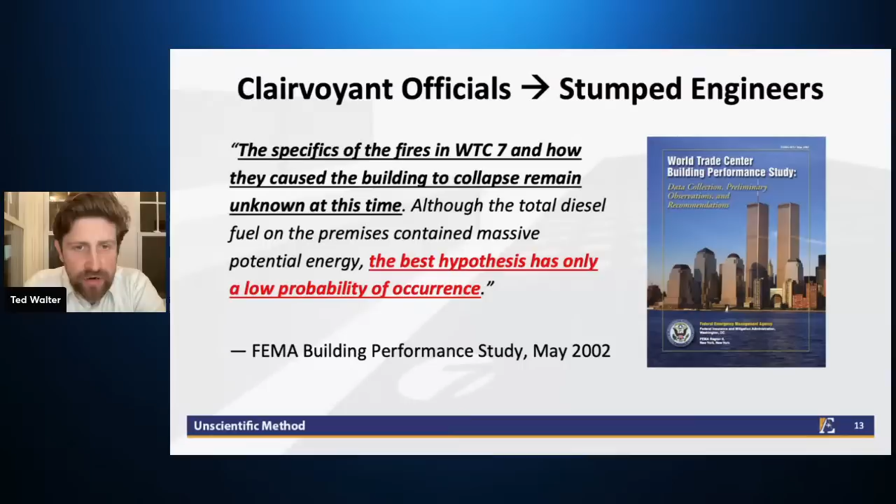Here's another example. In May of 2002, FEMA published a preliminary report on the collapse called World Trade Center Building Performance Study, Data Collection, Preliminary Observations, and Recommendations. In the concluding section of the chapter on Building 7, they said: the specifics of the fires in WTC 7 and how they caused the building to collapse remain unknown at this time. Although the total diesel fuel on the premises contained massive potential energy, the best hypothesis has only a low probability of occurrence. So how were officials able to predict something that had such a low probability of occurrence? Something that could not be explained 9 months later after the event.

Let's continue. Now we are 5 years after the event. This is the lead investigator for NIST, the National Institute of Standards and Technology, being interviewed for an article in New York Magazine, March of 2006. At that time, NIST had been studying the collapse for around 3.5 years, since they started their investigation in August of 2002. NIST did have some preliminary hypotheses on 7 World Trade Center, but Sunder paused: 'But truthfully, I don't really know. We've had trouble getting a handle on building number 7.'

Okay, fast forward to 2008, and the mystery has now been solved. First, I'm going to play a clip where Dr. Sunder announces their conclusions.

Our take-home message today is that the reason for the collapse of World Trade Center 7 is no longer a mystery. World Trade Center 7 collapsed because of fires fueled by office furnishings. It did not collapse from explosives or from fuel oil fires. It collapsed because fires, similar to those experienced in other tall buildings, burned in the absence of water supply to operate the sprinklers, and burned beyond the ability of firefighters to control it. It fell because thermal expansion, a phenomenon not considered in current building design practice, caused a fire-induced progressive collapse.

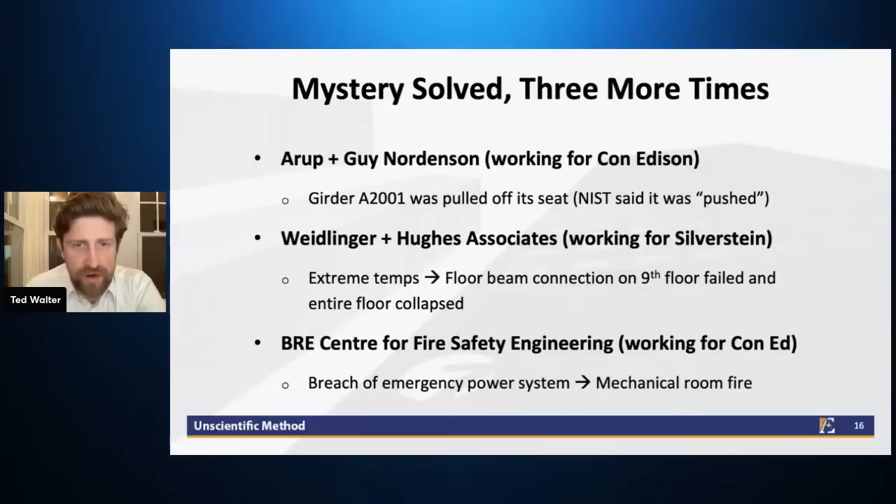So how do we have all these different theories of fire causing the collapse? Isn't there just one theory that we have all of this evidence for?

This is from a paper by Jose Torero, who I just mentioned. He and his co-authors wrote: after years of investigation by some of the world's leading experts in both fire and structural engineering, there remains multiple possible hypotheses without any consensus on how the building behaved and failed because of the fire. They continue: the collapse of WTC-7 remains to this day a unique event in the history of structural fire engineering. Despite occurring nearly 20 years ago, there's no real way to know exactly what caused its failure.

So basically, he's saying that the mystery actually can't be solved. This mystery will go on forever.

So what does all of this mean? Well, one thing it means, at least, is that there is no conclusive evidence supporting any of these hypotheses. If there was conclusive evidence, there would presumably be consensus around it. I think we should view skeptically all of these fire-based theories, because if there was conclusive evidence, I think a consensus would have developed around one of these. And it wouldn't have taken all of these engineers so long to come up with these theories.

So we're going to focus on the NIST investigation, because that is the investigation conducted by the U.S. government. NIST was statutorily mandated by Congress to establish the likely technical cause or causes of the building failure. It is thus the only investigation responsible to the public and guided solely by an interest in discovering the truth, or should have been, whereas the other investigations were private investigations that were part of a lawsuit.

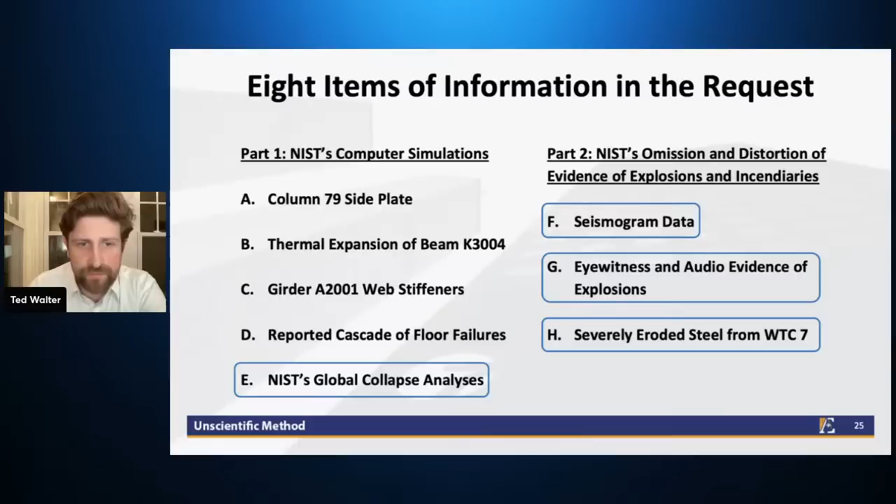Again, just reminding you what the three areas of evidence are: the building's structural behavior, the evidence of explosions, and the evidence of incendiaries. These are the different sections of the request for correction that correlate to each of those areas of evidence. So Section E, NIST global collapse analyses, looking at the structural behavior of the building, is where we're going to start.

This is a key claim that was made in the NIST report: given the complexity of the modeled behavior, the global collapse analyses match the observed behavior reasonably well. The global collapse analysis confirmed the leading collapse hypothesis.

So because there was no physical evidence—it was all destroyed in the weeks and months after 9/11—NIST's investigation basically conducted itself by coming up with a scenario that it could run in its model, and then it could say our model matches the observed behavior in the videos.

So this is a key claim here: how well does our model match the observed behavior? If it matches it, then perhaps our hypothesis is correct. If it doesn't match it, then your model is actually disproving your hypothesis. And this is what we argue.

The latter is what we argued in the request for correction. This was the claim that we made: contrary to NIST's assertion, NIST global collapse analyses do not match the observed behavior reasonably well and do not confirm NIST's leading collapse hypothesis.

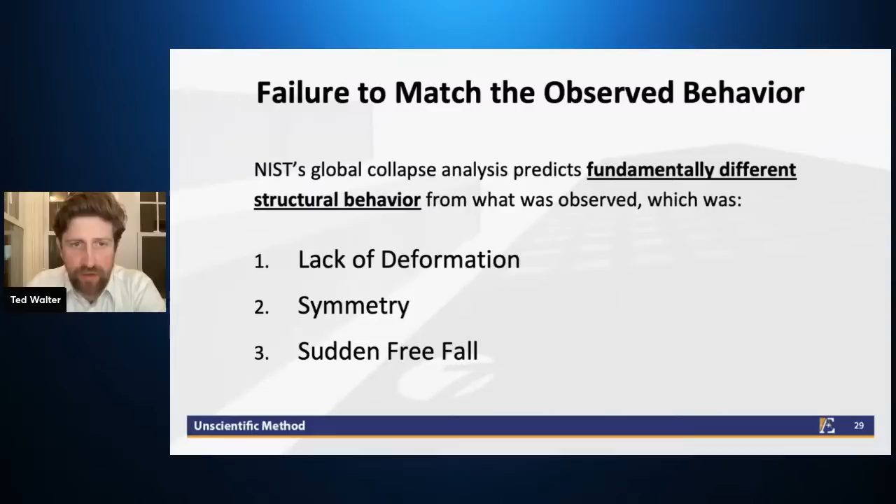So let's take a look at the video and let's take a look at NIST's model. First I'm going to play the same video we saw before during the news clip, but now there's none of the news graphics around it.

A lot of people will look at that animation and say, well, that doesn't really look like the real thing. And those people, I think, are right. In the request for correction, we went a lot deeper and methodically showed the ways in which this animation of the global collapse analysis did not match the observed behavior.

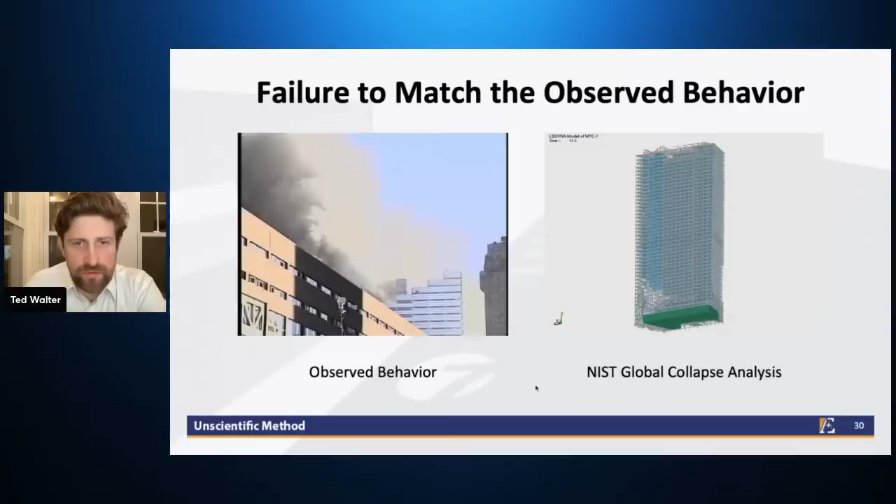So, the lack of deformation. NIST does us some favors - by us, I mean people interested in understanding what really happened. They do us some favors throughout their report here and there. One of them is in figure 5-201, where they overlay two separate shots of the building.

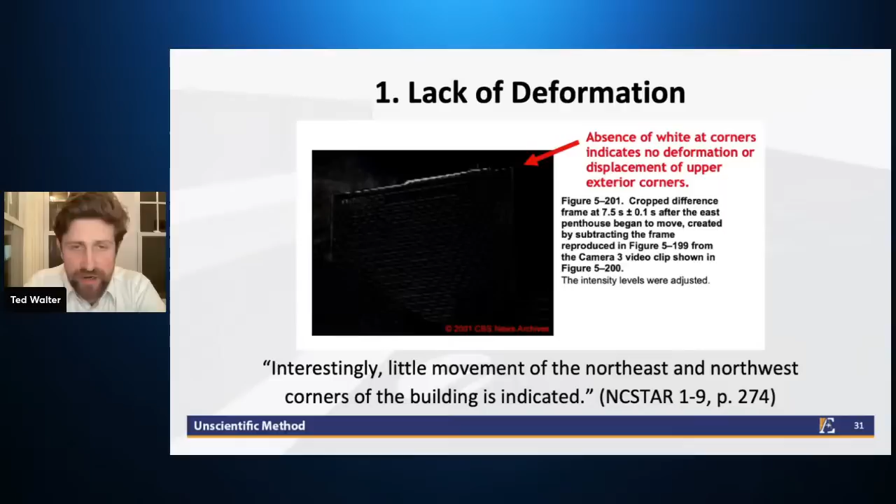We're going to get into that issue a little bit later, but the main thing to observe here is that there was no deformation. Whenever this collapse really started, there was no deformation.

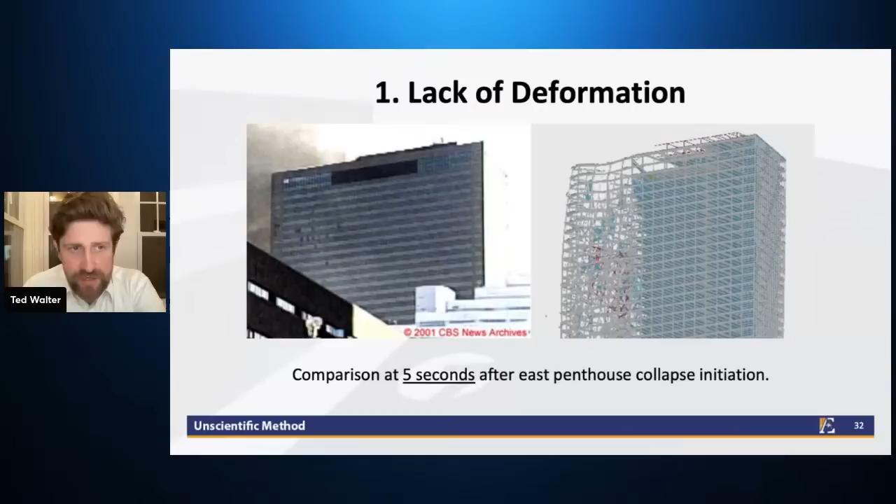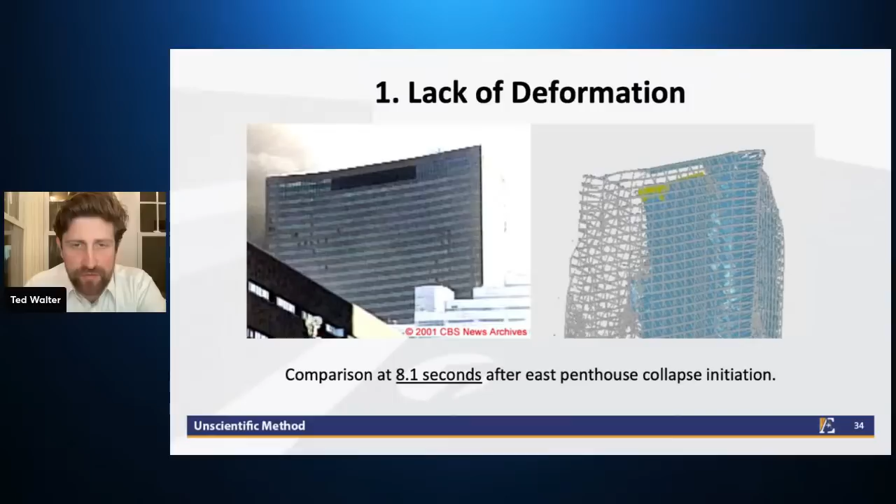Okay, and this is a figure from the NIST report just showing you that deformation from the west and from the south, just to make it very clear that we're talking about an entire side of the building basically caving in here in their model. On the right, we've actually overlaid - at a certain point, I believe that's at 7.5 seconds after the collapse initiation - we show how much deformation there is by overlaying what the building looked like before the collapse initiated.

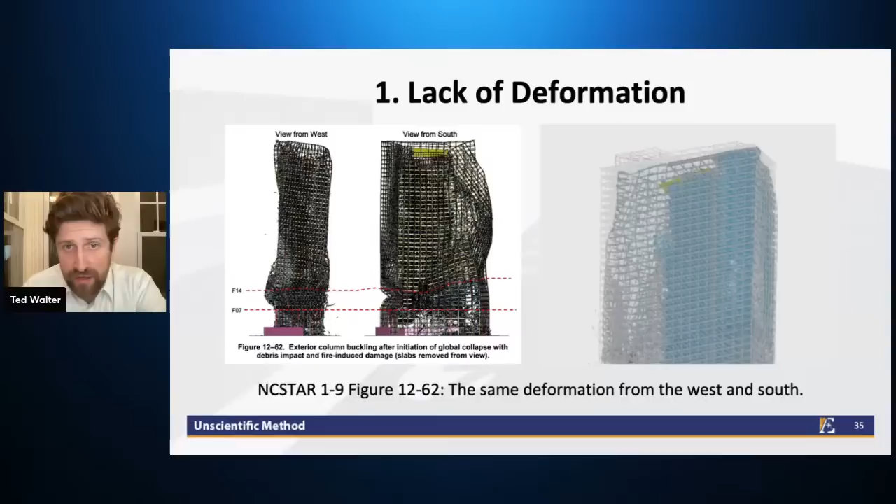Now, NIST realizes that this is a problem, and so they try to downplay the extent of deformation that was predicted in their model. They try to say only later in the model, after the initiation of global collapse, do the upper exterior wall deformations from the NIST analysis differ from the video images - trying to paint this picture that once the thing started to go down, there was a lot more movement, much harder for the model to predict the behavior, and you were going to start to see some deformation.

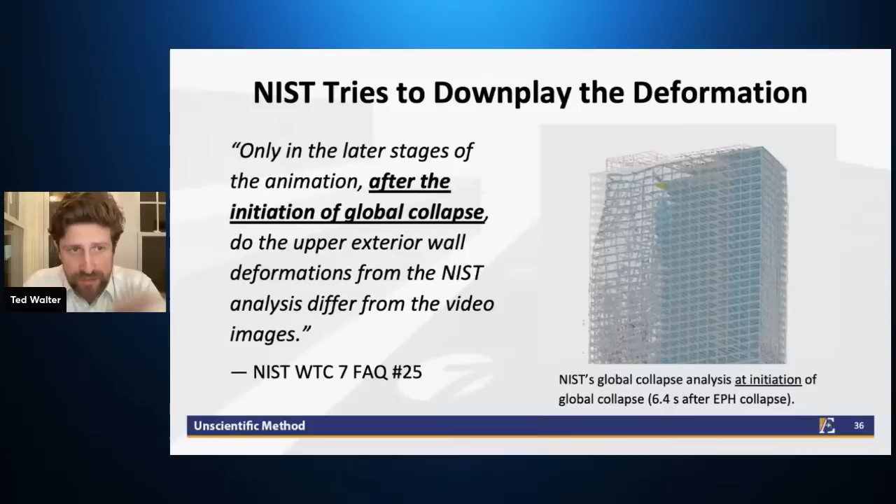Well, actually, when you look methodically at their animation, what I've done here is overlaid the animation right at the point that NIST says the collapse initiated. So in real life, the collapse, according to them, initiated 6.9 seconds after the East Penthouse collapse initiation. They say that in their model, they got the collapse to initiate at 6.4 seconds after, which they're happy with - so it's a half second earlier, but this is what they say is the start of global collapse initiation. And actually, the building has already deformed on the eastern side, has already deformed significantly. Yet they say in their FAQs that there was not any deformation until after the initiation of global collapse. This analysis shows that claim to be objectively false.

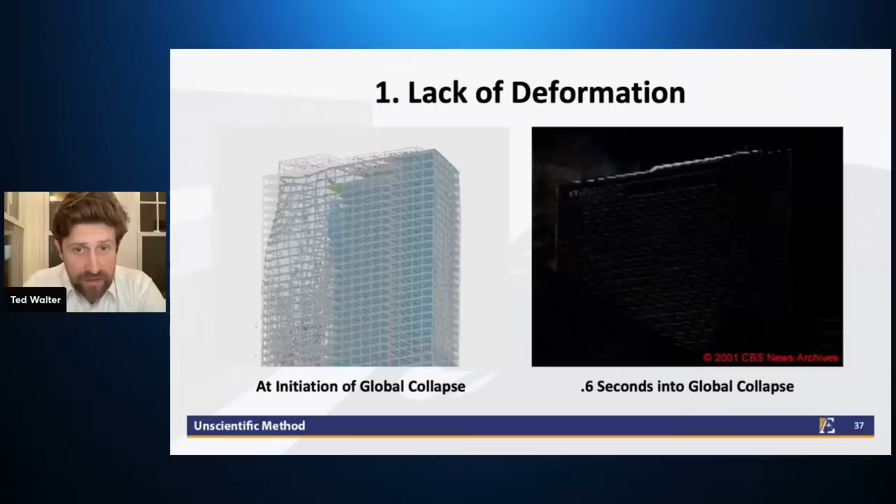So just to sum it up: NIST model proves that there would be lots of deformation if there were column failures occurring in the interior of the building. That is shown on the left - at initiation, significant amount of deformation already. On the right, 0.6 seconds into collapse, or what NIST says is the beginning of the collapse, there's no deformation whatsoever. So what does this mean?

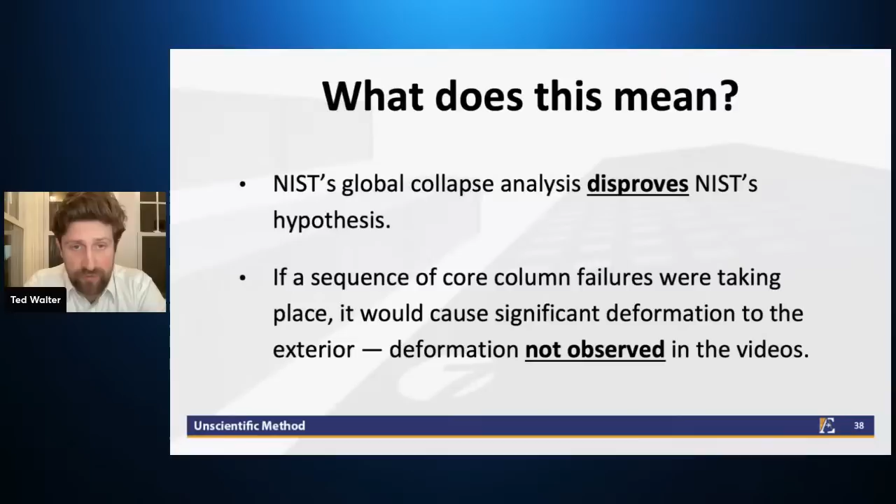NIST global collapse analysis disproves NIST's hypothesis. If a sequence of core column failures were taking place, it would cause significant deformation to the exterior - deformation not observed in the videos.

Okay, let's look now at symmetry. This section is a little bit shorter. There's not as much to show, but again, NIST does us a favor of describing what actually happened accurately.

They write: both the northeast and northwest edges began to tilt toward the north shortly after the building began to move downward. The northwest edge initially tilted in a similar manner, but then settled back to its original line and fell nearly vertically, or directly toward or away from the camera.

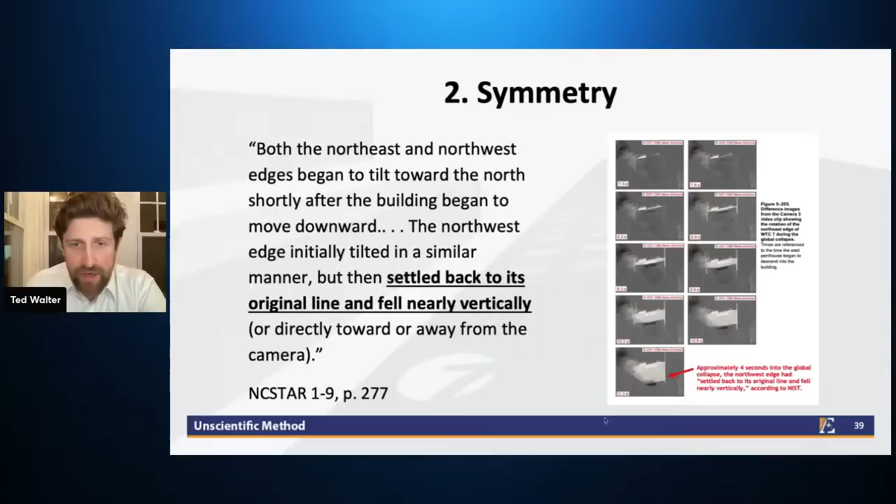So if you look at the very bottom here, this bottom shot, you can see that a full 4 seconds into the collapse, the building is still falling symmetrically in a vertical line. That's quite remarkable.

So let us ask the question: does NIST's model fall vertically, or does it tilt north first, since that's what they say happened first to part of the building? No, actually the building tips to the south.

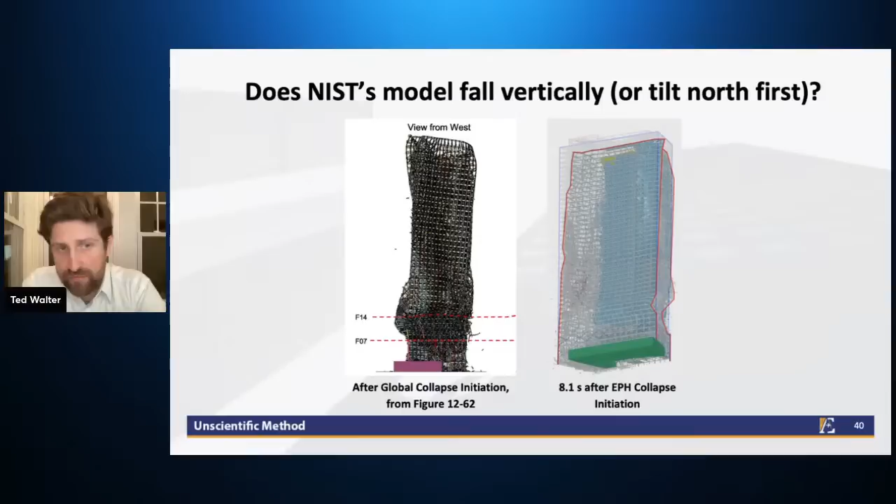On the left here, you see a figure of their model from the west, and you see the building starting to tip south. If we take the final frame of NIST's animation and compare it to when the building was standing upright, we see again that the building is tipping backwards, or to the south, tipping away from the view of the camera or of the animation.

I want to emphasize that this is very early in the collapse. This is 8.1 seconds after the penthouse collapse initiation. Over on the right here, we see this shot is 8.3 seconds, so this is very close to each other. Within 0.2 of a second, we get a lot of tipping of the building southwards.

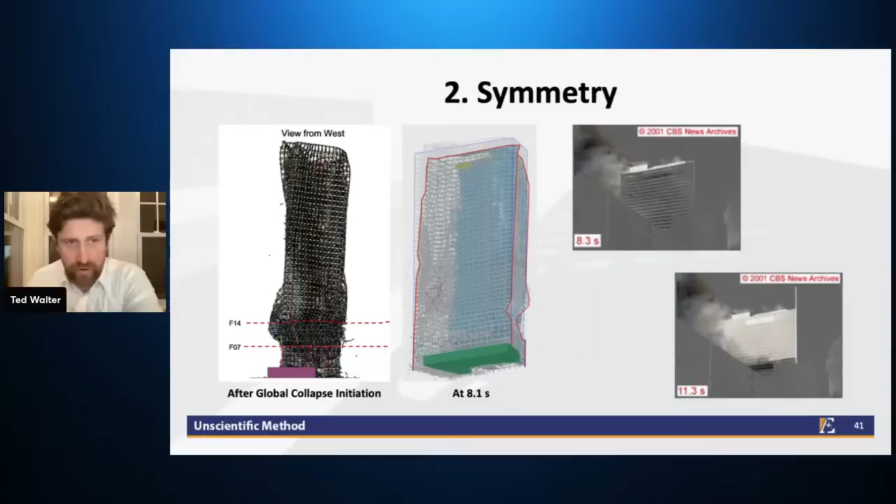We got almost no movement here in the real thing. And yet, even 3 seconds later, in the real thing, the building is still traveling downwards almost perfectly vertically. I wonder where this building would be 3 seconds later if NIST allowed the animation to keep running. Chances are it would be far more tipped to the south, maybe halfway down, halfway all the way over. Maybe that's why they terminated it.

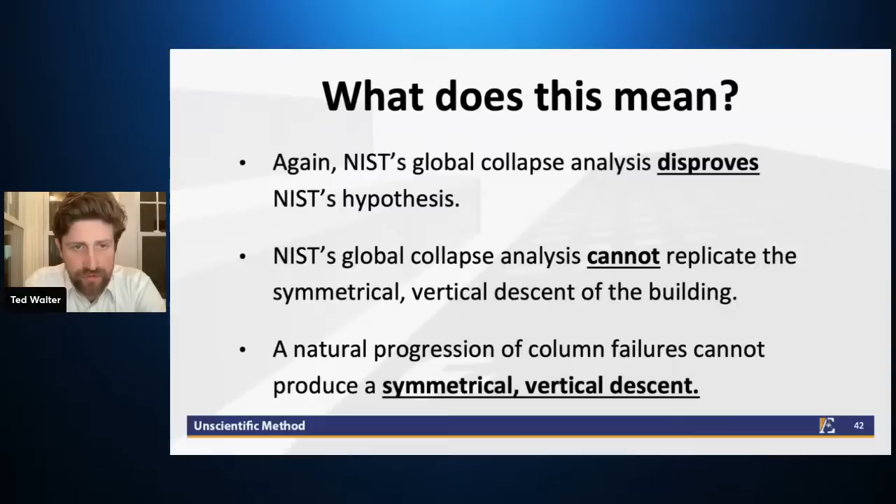What does this mean? Again, NIST's global collapse analysis disproves NIST's hypothesis rather than proving it. NIST's global collapse analysis cannot replicate the symmetrical vertical descent of the building. A natural progression of column failures cannot produce a symmetrical vertical descent, or that should be the takeaway.

Okay, the third aspect of the building's behavior was its sudden free fall. And I add the word sudden there because we have now established conclusively that the transition to free fall was instantaneous, and instantaneous across the entire width of the building, not just at one point.

So first of all, what I want to say is part of NIST being able to claim that their model matched the observed behavior reasonably well also involved mischaracterizing, at least in this case, the observed behavior. So what we wrote here: to help its claim that the global collapse analyses match the observed behavior reasonably well, NIST mischaracterizes the observed behavior.

So how did they do that? They came up with 3 stages of descent. Stage 2 is a stage that is generally agreed upon, that the building came down in free fall for at least 2.25 to 2.5 seconds.

At first, NIST actually tried to deny that the building came down in free fall when they issued their draft report in August of 2008. Thanks to a public comment by physicist David Chandler challenging NIST's claim and showing that the building actually came down in free fall, NIST eventually reversed themselves and acknowledged in their final report that it came down in free fall.

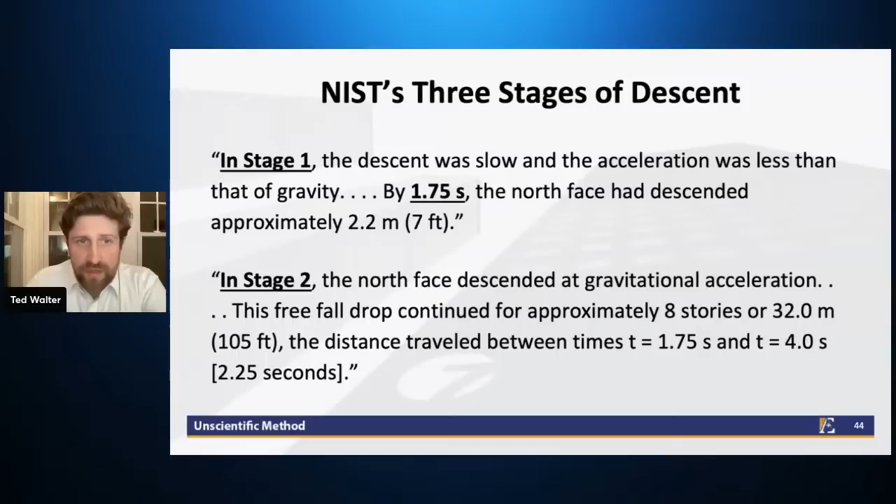The problem is, and what we really discovered as we worked on this request for correction, is that NIST based this claim—we didn't discover it, but it became, I would say, solidified through further research—NIST measured the downward motion by tracking the vertical position of a point near the center of the roof line.

Okay, so maybe many people have probably seen this graph before. It is in the NIST report. It shows that period of free fall. But again, we're looking at that stage 1. What about this stage 1 here? NIST came up with stage 1 based on measuring the movement of a single point near the center of the roof line.

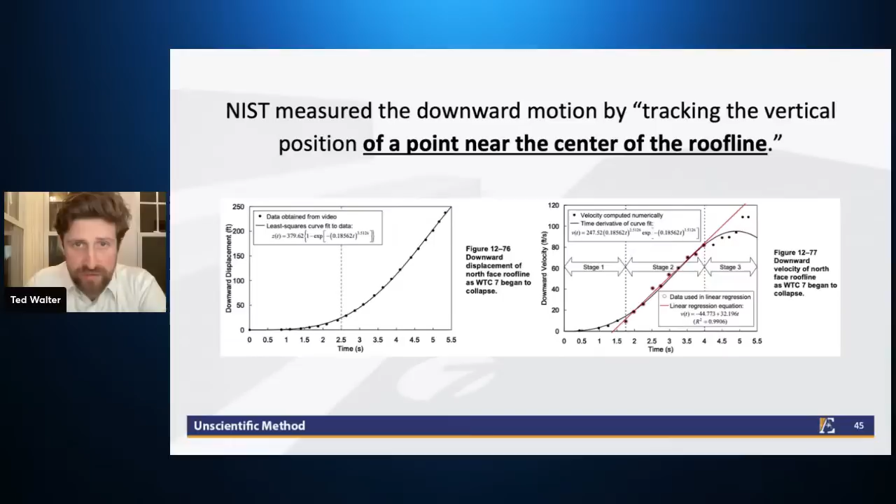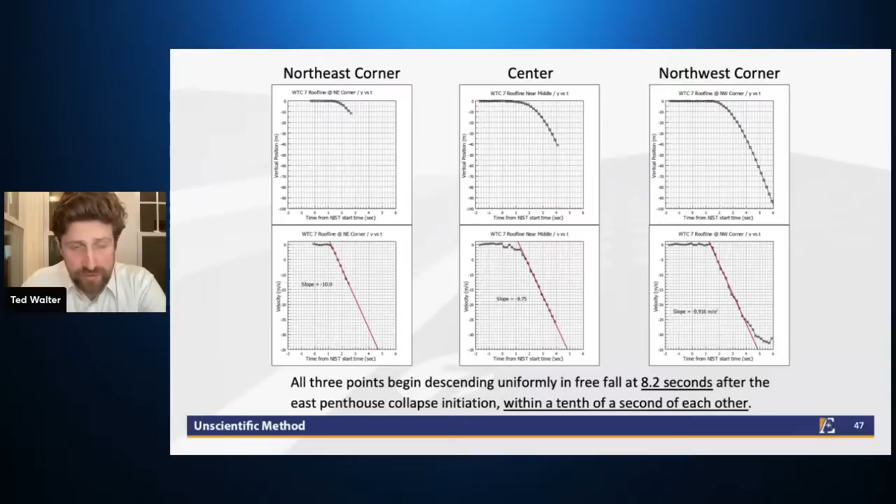This is corroborated by NIST in that first favor they did for us: no movement of the corners 7.5 seconds after the east penthouse collapse initiation. That's 0.6 seconds after the 6.9 second mark, which we'd say is artificially early. It's proven to be early because 0.6 seconds later, most of the building, the northeast and northwest corners, haven't moved at all. So Chandler's analysis is actually consistent with what NIST showed us in its report.

From that, we derive three problems with NIST's stage one. The first, least significant, is that the initial movement at the middle of the roof line lasted 1.3 seconds, not 1.75, according to Chandler's analysis. More importantly, NIST wrongly portrays movement at the middle as a smooth transition to free fall, when in fact it dropped 0.5 meter, stopped, dropped another meter, and then entered free fall. So it wasn't a gradual buildup, it was actually more of a jerky motion, and then the whole building went down together.

Most importantly, the problem is that NIST generalizes the motion of the middle of the roof line to represent the motion of the entire roof line. They say by 1.75 seconds, the north face—not the middle of the north face, just the north face—has descended approximately 2.2 meters. So in addition to making it easier for them to claim their model matched the observed behavior, maybe this is really about painting the picture of a gradual buildup to free fall, because free fall itself is supposed to be impossible.

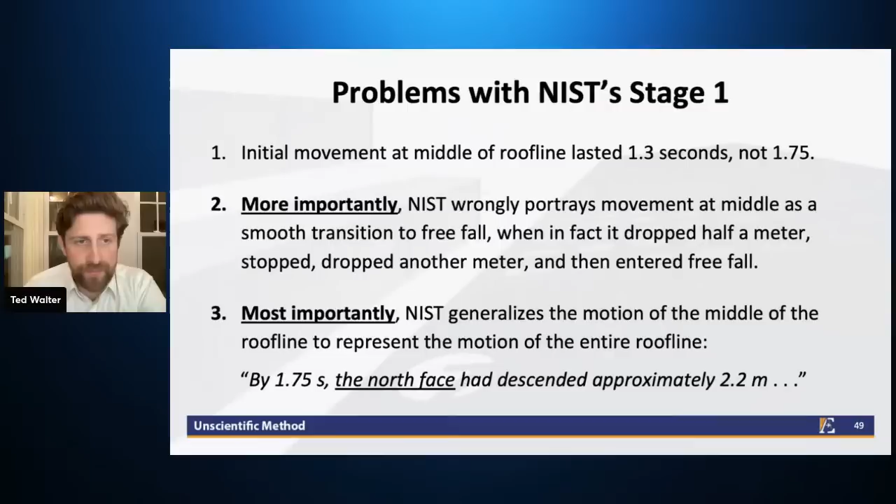So when we look at their model, do we see a sudden transition to roughly 2.5 seconds of free fall? This model on the left is very short because it's from the moment of global collapse initiation to the end of the model, which is about 1.5 seconds or less.

Oh yeah, 1.8 seconds. I'll play it for you once more. Okay, when we actually measured the distance it traveled in that 1.8 seconds, we see a 1.5 story descent. That's what we're pointing out here on the right. If you look closely, you can see it descended about 1.5 stories, approximately 6 meters over that 1.8 seconds.

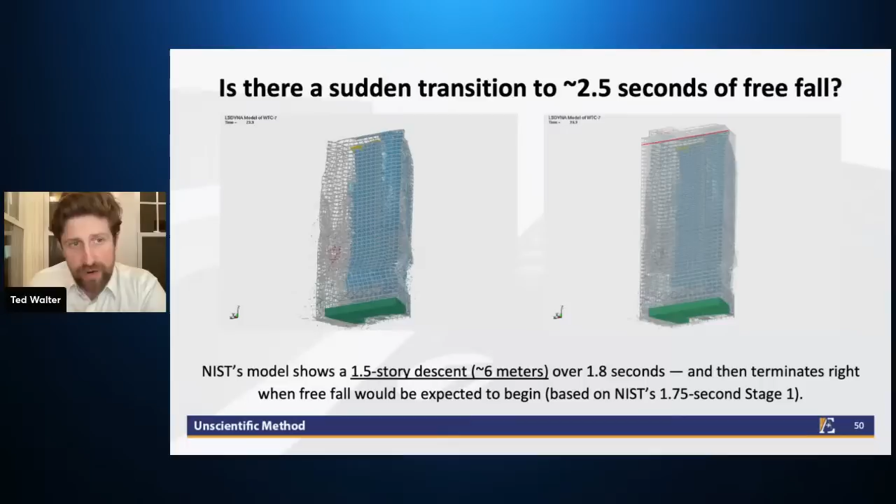And then it terminates right when free fall would be expected to begin. If we take NIST's 1.75 second stage one to be true, that would mean around 1.75 or 1.8 seconds we would then see free fall. And that's right when the model terminates.

The observation here, I'll just spell out what I was getting at: a 1.5 story, 6 meter descent followed by premature termination does not match the observed behavior that we know to be true, or even NIST's 3 stages, because NIST stage 1 had a 2.2 meter drop.

Yet NIST claims in its report that the 3 stages of collapse progression are consistent with the results of the global collapse analysis. Well, that's just objectively false, because there's no way, when you look at their animation of their model, that it is consistent with either the 3 stages of collapse, or even at least stage 2 and stage 3. But not even NIST's made-up stage 1.

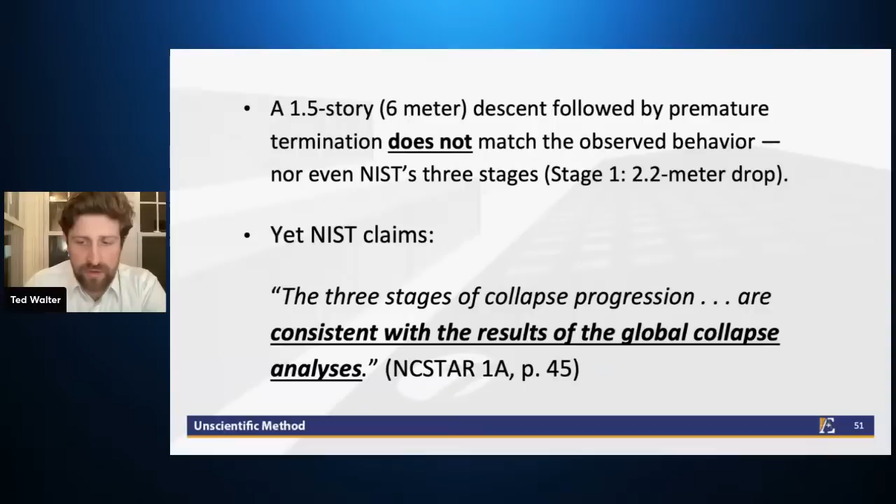So what does this mean? Just as before, NIST's global collapse analysis disproves its own hypothesis. NIST's global collapse analysis cannot replicate the sudden transition to approximately 2.5 seconds of free fall.

The reason I say cannot and does not is because I suspect, based on what we know from our other analysis or other criticism of NIST's modeling and its probable collapse sequence, that NIST did everything it could to get its model to behave the same as the building actually behaved. And so this is the closest that it could possibly get. That's why we say cannot.

A natural progression of column failures cannot produce, the takeaway here is that a natural progression of column failures cannot produce a sudden transition to sustained freefall.

So the question then is, how does NIST even come close to claiming that their model matches the observed behavior? They have all of these observables that they say their model either predicted or that are at least consistent with things that happen in real life, temporally consistent with their collapse scenario. So there was an east-west vibration of the building of 2 inches that occurred 6 seconds before the east penthouse collapse initiation.

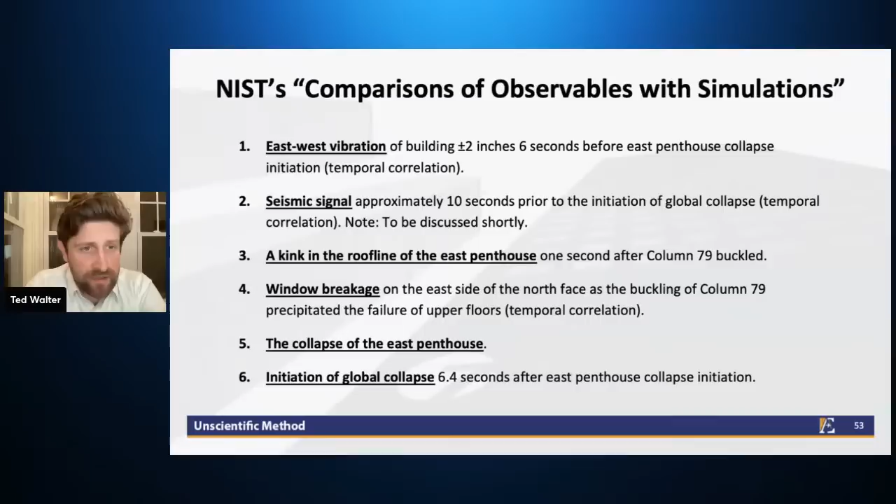The collapse of the east penthouse, and then the initiation of global collapse. So they're very pleased that they managed to get their model to predict the collapse of the east penthouse and the initiation of global collapse. But the problem is all of these observables are also consistent with the hypothesis of controlled demolition, if not more consistent or better explained by that hypothesis.

So aside from achieving the collapse of the east penthouse and then the building, NIST's model predicts fundamentally different behavior from what was observed. So they managed to get those 2 events to happen, the collapse of the east penthouse and the collapse of the building. Who knows how they got it? They won't release their model.

Besides that, their model actually disproves their hypothesis because it predicts fundamentally different behavior from what was observed.

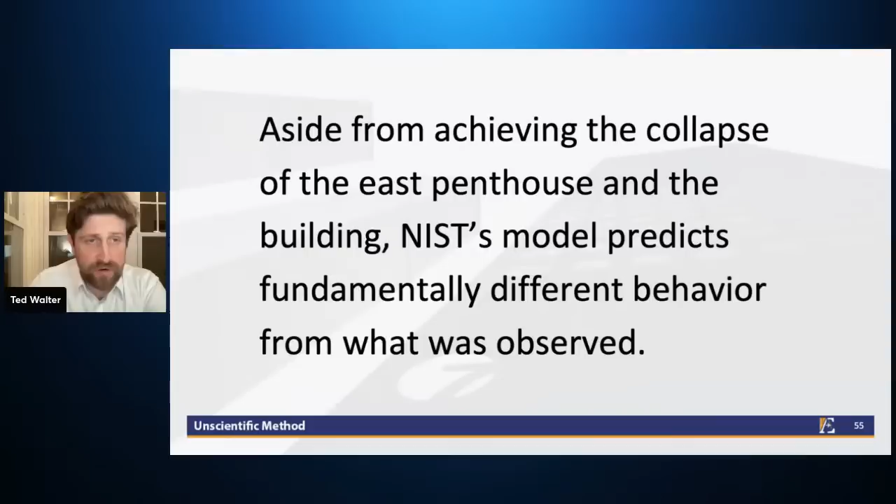In response to our request for correction, where we made all of these points in about 26 pages, NIST responded in a single page. They ignored our request to correctly characterize the sudden transition to freefall, didn't even address it. They ignored our central argument that their model predicted fundamentally different structural behavior, and basically just repeated claims they had already published elsewhere, whether in their report or their FAQs.

Including the objectively false claim I just showed before, that the upper exterior wall deformations in their animation differed from the video images only in the later stages after the initiation of collapse. I'll show you that on a subsequent slide.

After we showed objectively that there was deformation in their animation at the point global collapse initiated, they still just wrote to us in a single paragraph, repeating the previous claim as if we had said nothing.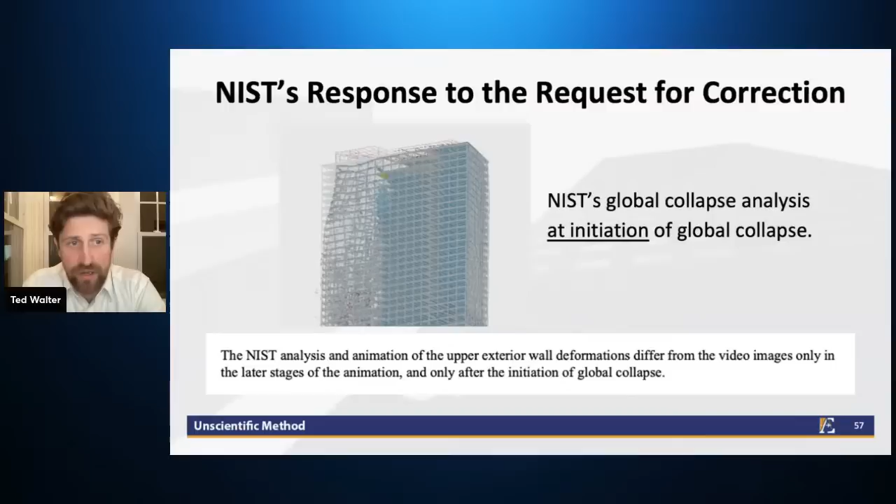That is a screenshot from their response to our request for correction: 'The NIST analysis and animation of the upper exterior wall deformations differ from the video images only in the later stages of the animation and only after the initiation of global collapse.' It was as if that point, that analysis, just didn't exist in our request for correction.

Moving on, looking at the two other areas of evidence: evidence of explosions and evidence of incendiaries. We're going to focus now on evidence of explosions. This presentation is probably going to run 75 to 90 minutes, not our typical 50 minutes or so. Evidence of explosions, seismogram data.

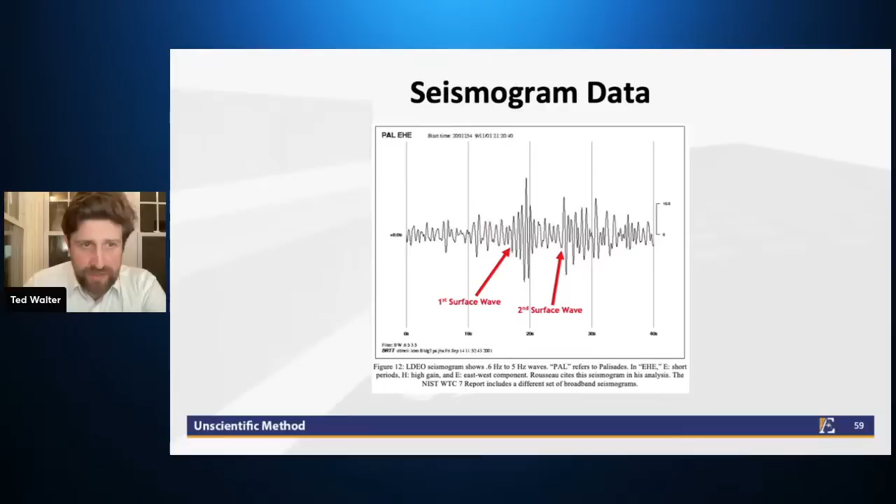This is a seismogram recorded at Lamont Doherty Earth Observatory, something like 13 miles away from Manhattan. It's part of Columbia University. People have heard a lot of conversation over the years about seismic activity when the Twin Towers went down. There was also seismic activity when Building 7 went down. In this case, there was one signal and then a second fainter signal recorded when Building 7 went down, and this is one of the seismograms that shows those waves.

So what they actually mean here is the cascade of floor failures that occurred allegedly low in the building, leading key column 79 to buckle, allowing the East Penthouse at the top to fail and collapse into the building. NIST claims that event generated seismic activity — those floors in one corner of the building collapsing over maybe 7 or 8 stories inside the building caused seismic activity that reached 13 miles.

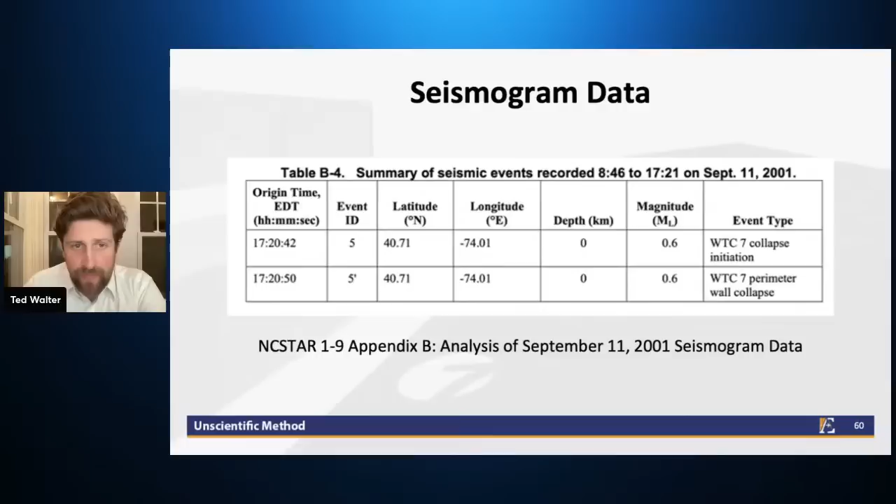This is from the appendix: there were two phases in the probable WTC7 collapse sequence that could have resulted in seismic signals. The first comprised the initial local failure and the vertical progression of failure — this is inside the building that allegedly led to the collapse of the penthouse. The interior debris falling onto the lower floors of WTC7 on the east side transmitted impact loads to the foundation.

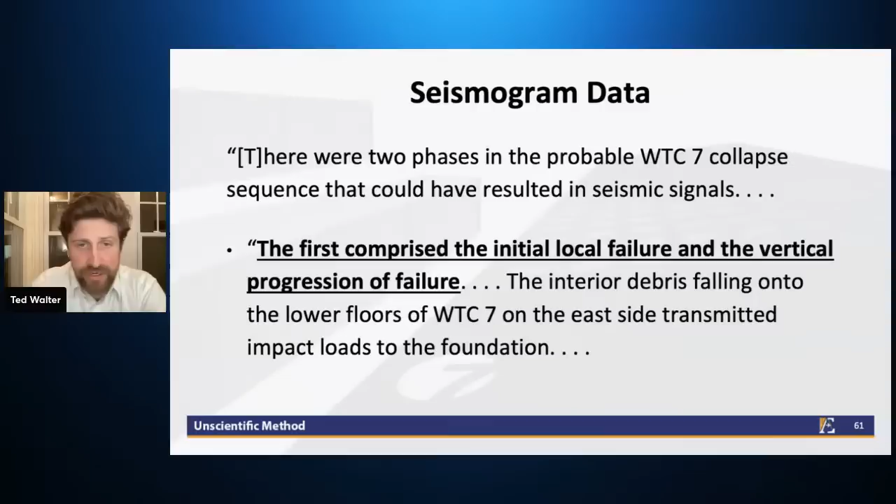The second seismic phase comprised the global collapse of the building. NIST points out that one would have expected seismic signals from this second phase of collapse to be generated over this entire episode, which lasted approximately 14 seconds, since debris was continuously impacting the ground. However, because the total energy dissipated by the impact was distributed over a long period of time, the strength of the signal at any given time was small and difficult to interpret.

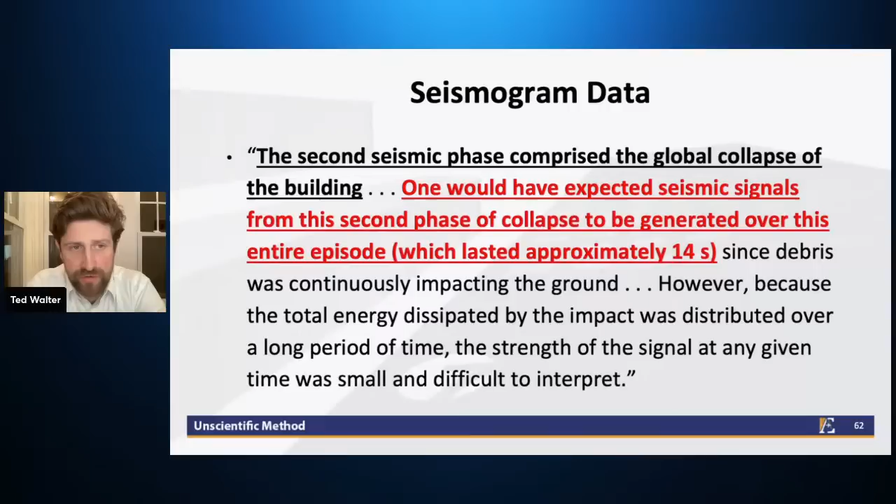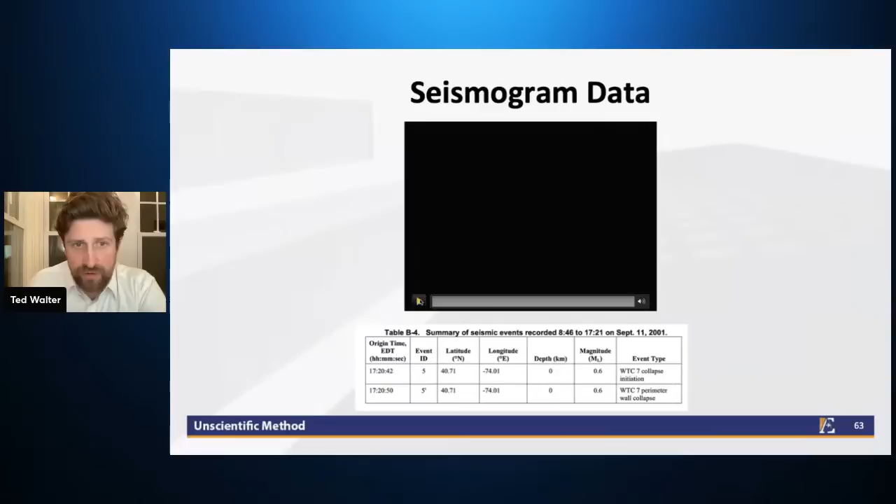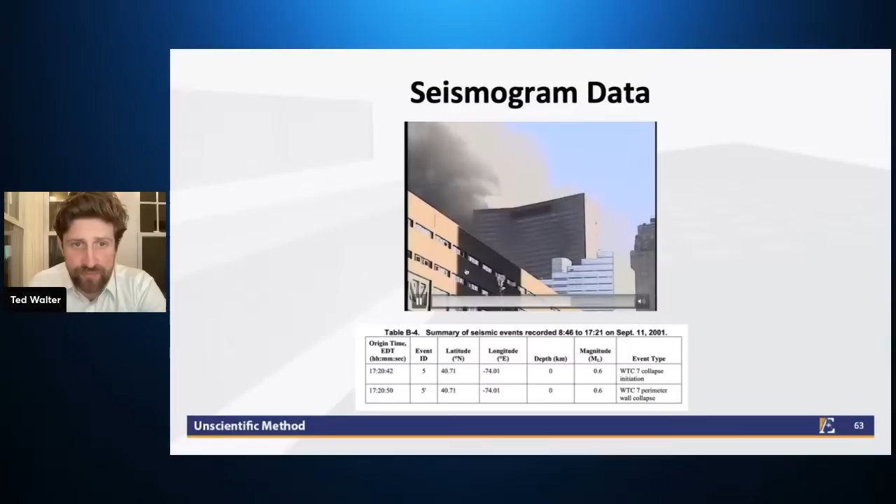I'm just going to make it very clear in case this is difficult to follow. I'll point out when these seismic signals were alleged, what NIST claims generated these seismic waves. First, right about now, or around now, there. And then right about now. And then not as much.

The first thing I want to point out, we did not include this in the request for correction because I wasn't aware of it at the time. Vaguely aware, but it didn't become totally clear to me until more recently that this interpretation completely contradicts NIST's interpretation of the seismic data for Towers 1 and 2.

This is from a paper that Graeme MacQueen, who we talked about earlier, published in 2009, looking at whether the ground shook when the South Tower collapsed. He did a lot of digging and dissecting, and he pointed out that according to FEMA, the start of the South Tower's collapse and the start of the seismic signal were simultaneous.

So what I mean by that is once the top of the South Tower started to come down, that's when FEMA attributed a seismic signal to the top of the South Tower starting to collapse. So there would be seismic activity as the collapse starts to happen, 60, 70 stories up.

However, NIST changed that. That's a whole other wormhole to go down, all the details and intricacies there and the reasons why this happened. But basically, NIST changed that and said, no, there wasn't any seismic activity during the collapses. It was only once the debris started hitting the ground.

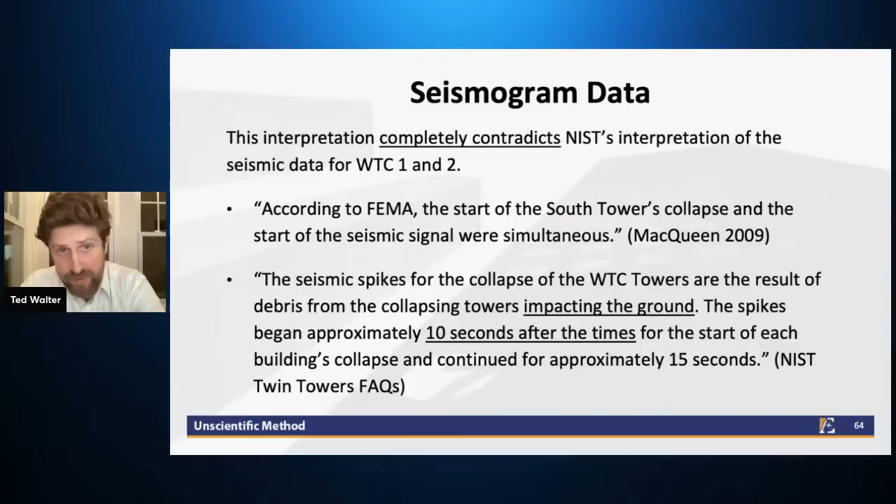But for Building 7, we have a handful of floors in one corner of the building collapsing onto each other, and that generates seismic activity. And then the initiation of the collapse of the building generates seismic activity, but not all of the debris from the global collapse hitting each other, falling to the ground for the subsequent 14 seconds or whatever. So it's completely backwards.

So these were the central claims that we made in the request for correction. NIST was incorrect in attributing the two seismic signals generated during the destruction of WTC-7 to a cascade of floor failures inside the building and to the initiation of the building's global collapse.

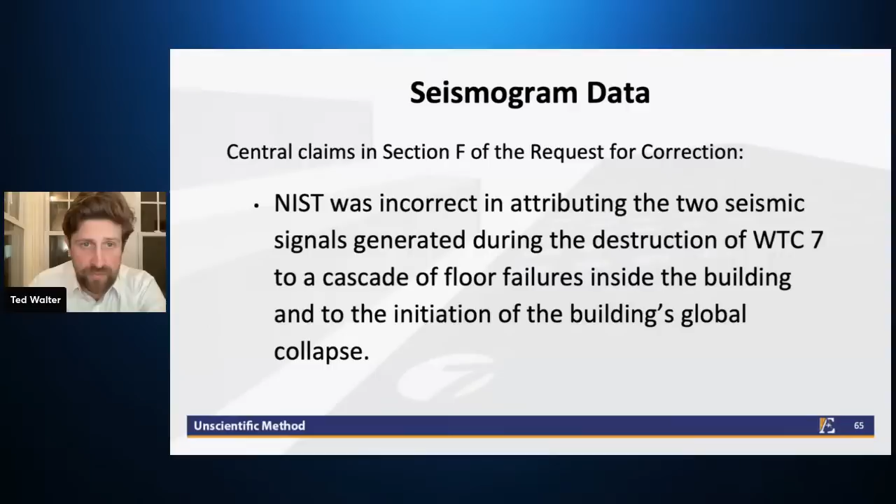The two seismic signals must have been generated by two subaerial explosions, and those are explosions that don't occur high up in the air, but also don't occur underground. They're near the ground. This is according to a geophysicist in France who provided a declaration for us. His name is escaping me at this exact moment, but you can find his paper on our website under technical papers. Andre Rousseau, that's it.

So the two seismic signals must have been generated by two subaerial explosions that corresponded in time and location to the initiation of the collapse of WTC-7's East Penthouse and to the initiation of global collapse, respectively. So we're saying that these seismic signals were generated by explosions that had to do with when the East Penthouse began to collapse and when the whole building started to come down. That's why you would see spikes of seismic activity at those precise moments.

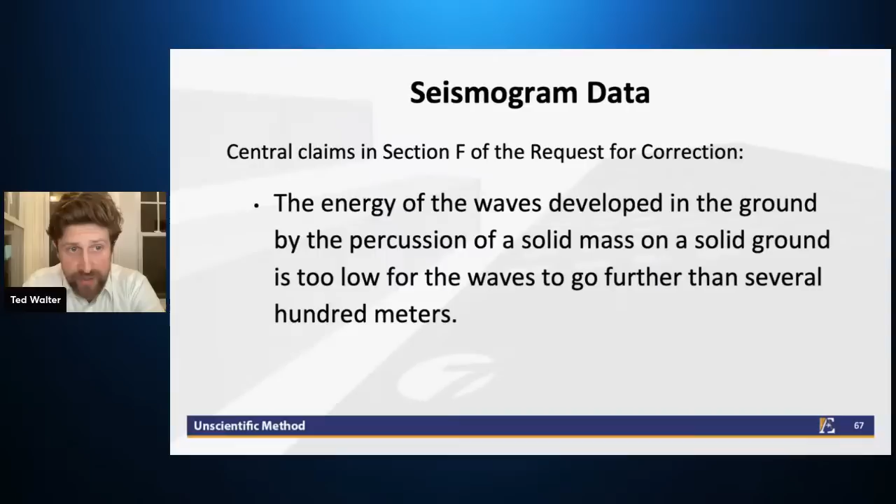The energy of the waves developed in the ground by percussion of a solid mass on a solid ground, according to Andre Rousseau, is too low for the waves to go further than several hundred meters. So he said there's no question that debris from buildings like Building 7 hitting the ground, or structural failures occurring inside the building, simply will not create seismic activity that will travel more than a few hundred meters.

And this is what I was alluding to before. NIST's probable collapse sequence is inconsistent with the observed seismic activity. The cascade of floor failures generated the largest seismic signal out of all of the seismic activity during the collapse of Building 7. The handful of floors that collapsed on each other, allegedly in the northeast corner of the building, is when we get the most seismic activity.

The initiation of global collapse generated a seismic signal. The initiation of global collapse would be associated with columns buckling, right? Not a huge amount of debris hitting each other. So why right at that moment?

And then, of course, we have 1.8 seconds, 2.25 seconds of free fall. So that third point there, the global collapse, including the impact after the top section free fell for 8 stories, did not generate a unique seismic signal. I would think if the entire top, however many 30 stories of the building, started falling for 2.25 seconds and then hit something, that maybe you would get some more seismic activity. But no, the seismic activity pretty much all occurred before that.

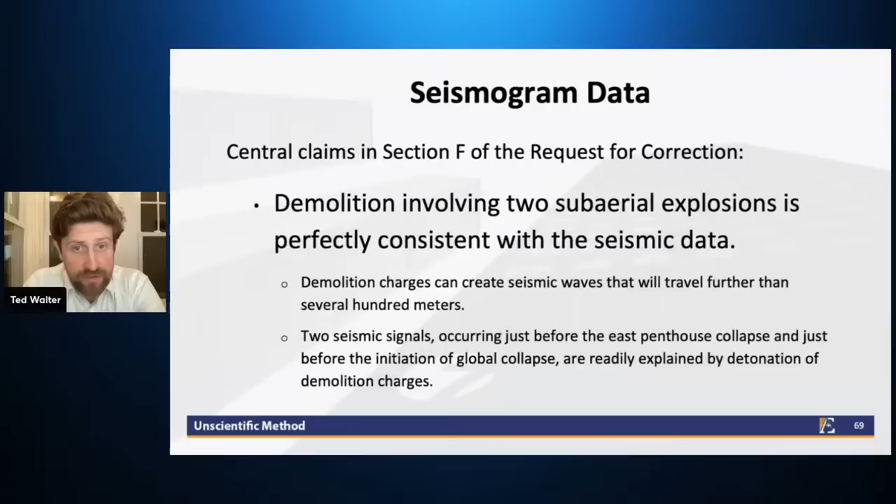Demolition involving 2 subaerial explosions is perfectly consistent with the seismic data. Demolition charges can create seismic waves that will travel further than several hundred meters. 2 seismic signals occurring just before the east penthouse collapse and just before the initiation of global collapse are readily explained by detonation of demolition charges.

NIST's response to this section of the request for correction was basically just, we disagree. It's our word against yours. And, you know, sort of the same as before, regurgitating the same points that are made in its report.

Okay, looking at the other evidence of explosions, we have eyewitness and audio evidence.

Okay, central claims in section G of the request for correction. The first claim, we made 2 separate claims. That's why I'm separating them right now. NIST ignored and distorted eyewitness reports and audio recordings indicative of explosions at the onset of and during the collapse of WTC-7. Also covered in this section, NIST distorted eyewitness reports of an explosion occurring inside WTC-7 on the morning of 9/11. This is the account of Barry Jennings and Michael Hess, which many people who are not new to this will be familiar with.

Okay, so in one section of its report, and there's also an appendix related to this, NIST writes this. They basically did an analysis that concluded that if there was any explosion capable of severing a key column in the building — they focused on column 79 — it would create a very loud sound of 130 to 140 decibels. They said there were no witness reports of such a loud noise, nor was such a noise heard on the audio tracks of video recordings of WTC-7's collapse.

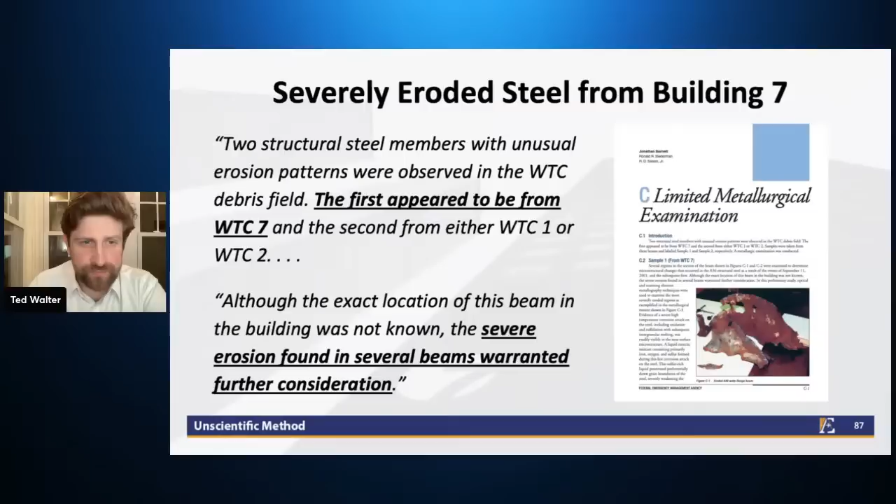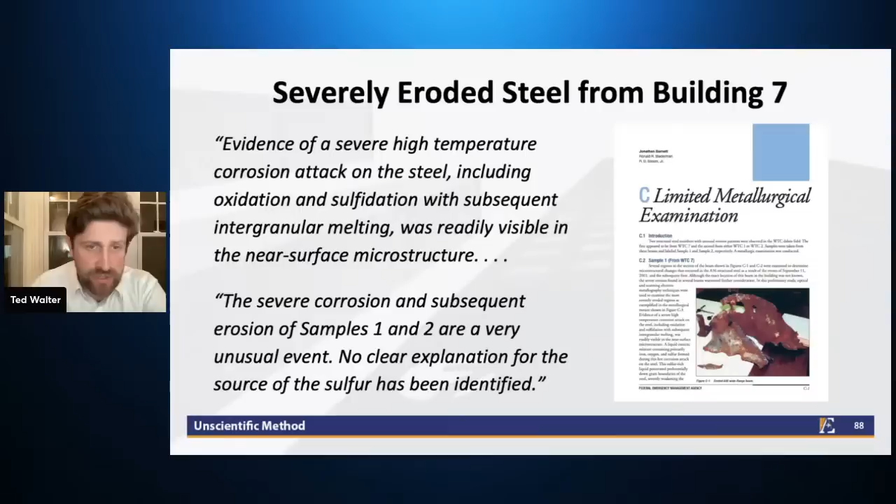Evidence of a severe high-temperature corrosion attack on the steel, including oxidation and sulfidation with subsequent intergranular melting, was readily visible in the near-surface microstructure. Severe corrosion and subsequent erosion of samples 1 and 2 are a very unusual event. No clear explanation for the source of the sulfur has been identified. A detailed study into the mechanisms of this phenomenon is needed to determine what risk, if any, is presented to existing steel structures exposed to severe and long-burning fires.

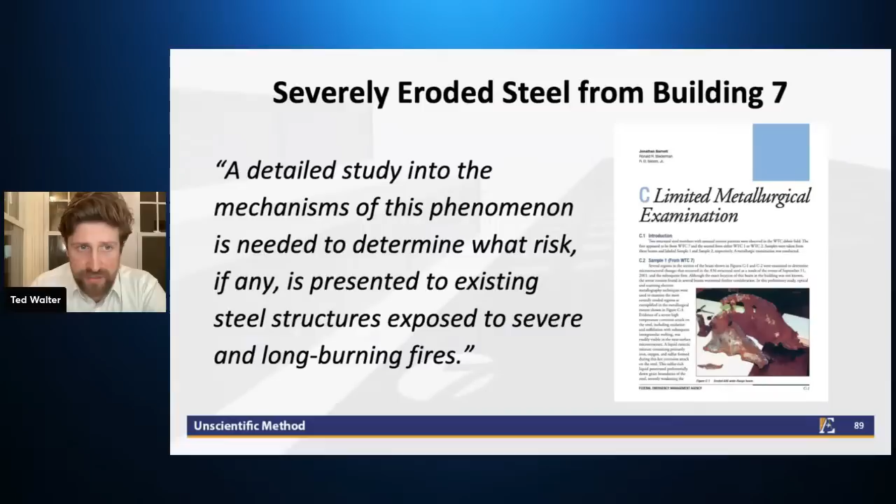So Appendix C of the FEMA report called for further study into this phenomenon. Following that, NIST Director Arden Bement, at a congressional hearing, said that NIST would address all major recommendations contained in the FEMA report. But NIST did not seek to perform tests on recovered steel from WTC-7 to determine the cause of the severe erosion.

Okay, now here's a clip of Shyam Sunder at the 2008 technical briefing addressing this piece of steel.

With regard to the issue of the residue, there's a reference often made to a piece of steel from Building 7 that is documented in the earlier FEMA report that deals with some kind of a residue that was found, sulfur-oriented residue. And in fact, that was found by a professor who was then at the Worcester Polytechnic Institute, Professor Jonathan Barnett. But that piece of steel has been subsequently analyzed by Professor Barnett and by Professor Rick Sisson, who is also from the Worcester Polytechnic Institute. And they reported in a BBC interview that aired on July 6th that there was no evidence that any of the residue in that piece of steel had any relationship to an undue fire event in the building or any other kind of incendiary device in the building.

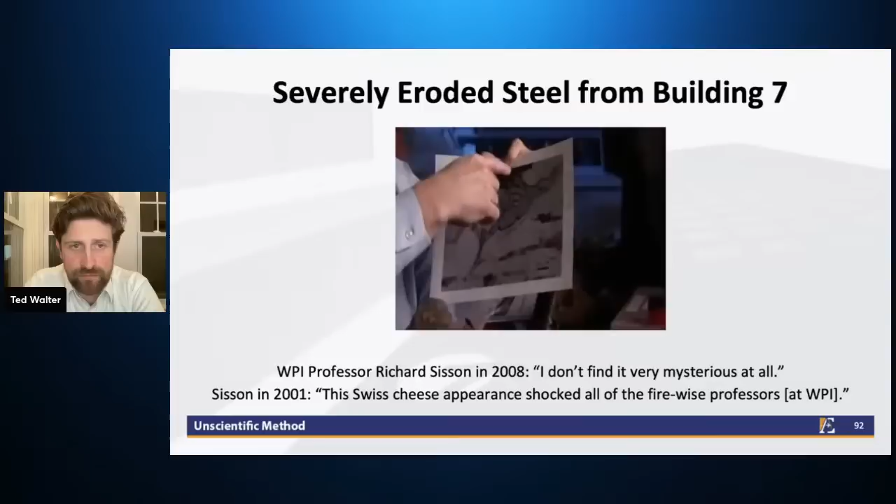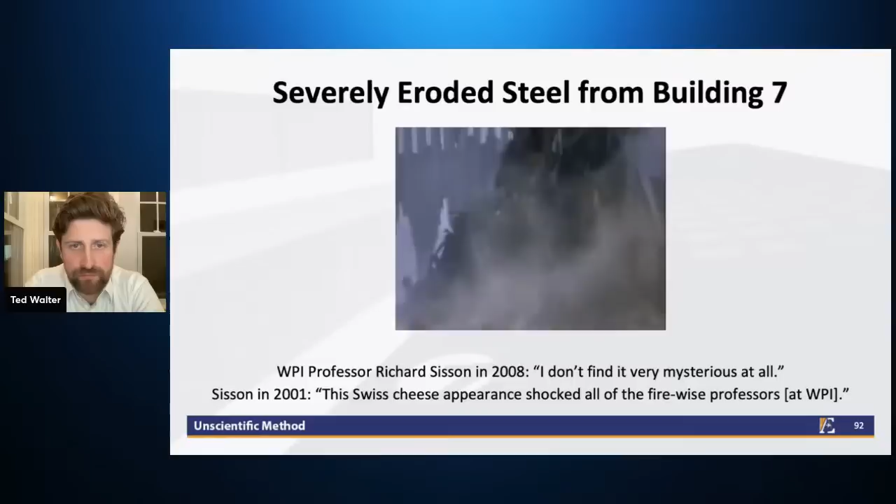Well, it was attacked by what we determined was a liquid slag. When we did the analysis, we actually identified it as a liquid containing iron, sulfur, and oxygen. You can see what it does is it attacks the grain boundaries, and this bit would eventually have fallen out, and it would continue the attack. Professor Sisson says it didn't melt, it eroded. The cause were those very hot fires and the debris after 9/11 that cooked the steel over weeks. The sulfur came from masses of gypsum wallboard that was pulverized and burnt in the fires. I don't find it very mysterious at all. That if I have steel in this sort of a high temperature atmosphere that's rich in oxygen and sulfur, this would be the kind of result I would expect.

It's interesting that the narrator says that it was caused by the gypsum, but he doesn't say that directly, or at least maybe he did during the interview. So what is he basing that on?

The latest paper that he and people on his team published was in 2006, and we touched on this in the request for correction. The title of the article says 'Metal Removal via Slag Attack of the Steel from Building 7 of the World Trade Center: Some Observations.' So they ran an experiment to see if they could reproduce this melting, this erosion that was seen on this beam and other beams. Reading from their paper: however, preliminary experiments at 1100 degrees Celsius, which is extremely hot, with mixtures of iron sulfide and iron oxide placed on the steel surface and heated in air.

Heated in air at 1100 degrees for 24 hours, the reaction was not fast and dissolved little metal in 24 hours. This observation indicates that the liquid slag attack probably took place during the prolonged exposure to the fire in the rubble. Now, that 'probably' is interesting. Why assume that it needs longer time? Maybe if that's the case, then why don't you run the experiment for longer and see if it happens? They didn't do that, but they assumed that it probably just needed to go on for longer. Why not, if you're not getting any erosion, why not actually question your hypothesis?

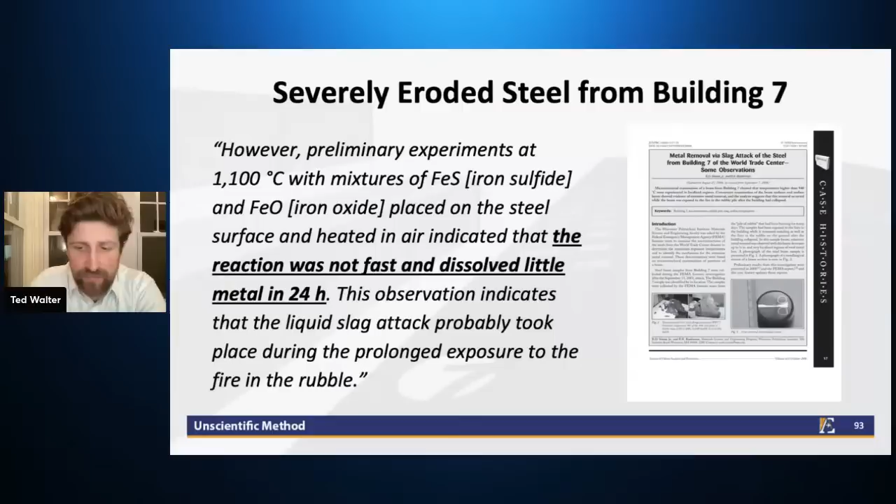So in the request for correction, we pointed out, in addition to the fact that this experiment wasn't continued, that it essentially was inconsistent with their hypothesis. Their hypothesis is fatally flawed for the simple reason that iron does not react with gypsum, which is composed of calcium sulfate. In chemical terms, iron is not electropositive enough to reduce sulfate. Gypsum wallboard is commonly used for fire protection for the fundamental reason that it cannot burn. The notion of gypsum wallboard burning for a sustained period of time and forming a liquid eutectic with iron is illogical on its face.

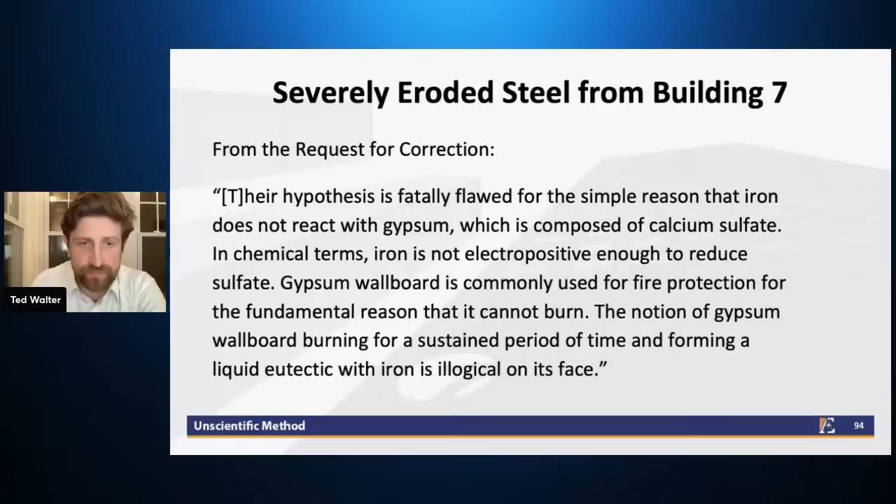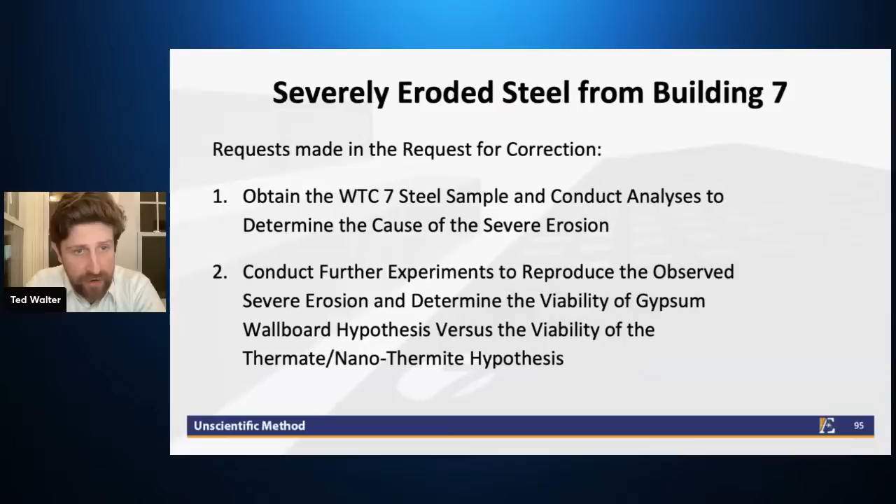So our request to NIST in the request for correction was to do the study that they didn't do at WPI, and to do the study that NIST has not already done: obtain the WTC7 steel sample and conduct analyses to determine the cause of severe erosion, conduct further experiments to reproduce the observed severe erosion, and determine the viability of the gypsum wallboard hypothesis versus the viability of the nanothermite hypothesis. What was NIST's response to our request for correction?

In the absence of a method to confirm that the FEMA 403 sample 1 that was tested at WPI is in fact steel from WTC7, there is no justifiable basis for conducting further analyses to examine other theories that explain the cause of the erosion in the sample. So NIST has basically played a brand new card that we don't know for sure that this steel is from Building 7, and therefore they say there's no justifiable basis for conducting further analyses.

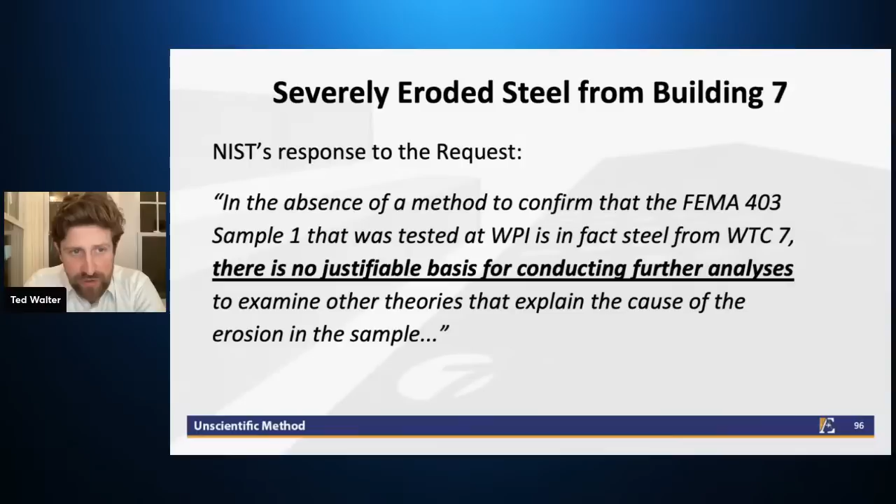Now, first of all, even if we don't know for sure 100% that the steel is from WTC7, if the NIST investigation were a sincere investigation, they would want to examine this steel and find out the cause of the erosion. Because maybe the steel was from Building 7, and maybe the erosion of this steel had something to do with the collapse of the building. Just maybe. So the idea of excluding it because you don't know for sure is totally unscientific. Beyond that, everything points to the, I'm going to say, almost fact that this steel is from Building 7.

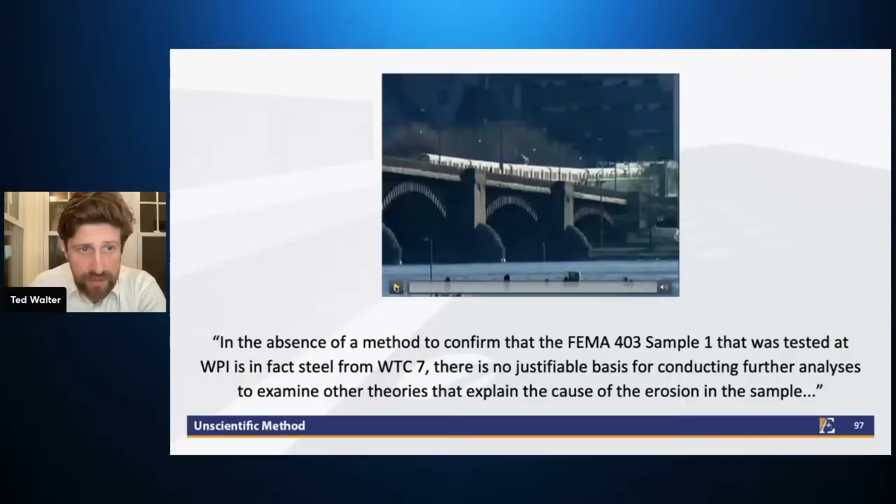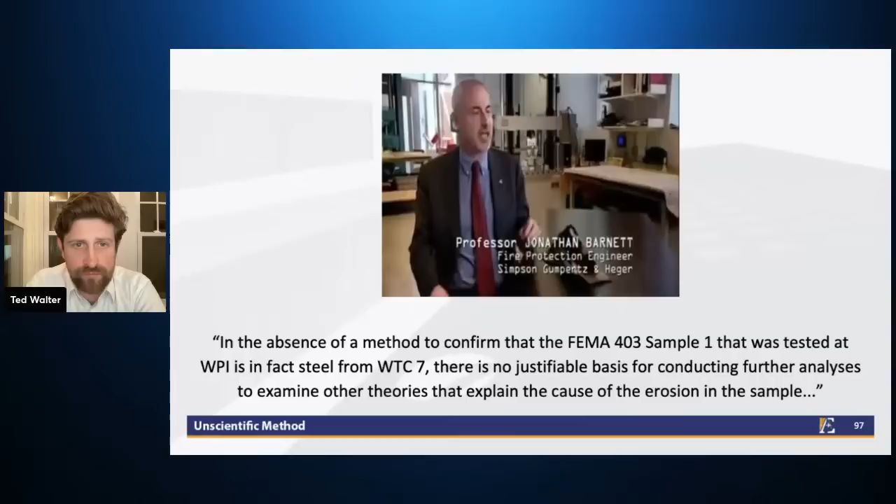In New England, the claims of the mysterious melted steel from Tower 7 has been unraveled. It was found by fire protection engineer Professor Jonathan Barnett in a salvage yard. It came from a much larger beam. This was the size of steel that they used in the construction of Tower 7. They didn't use this particular kind of steel in Towers 1 or Towers 2. So that's why we know its pedigree.

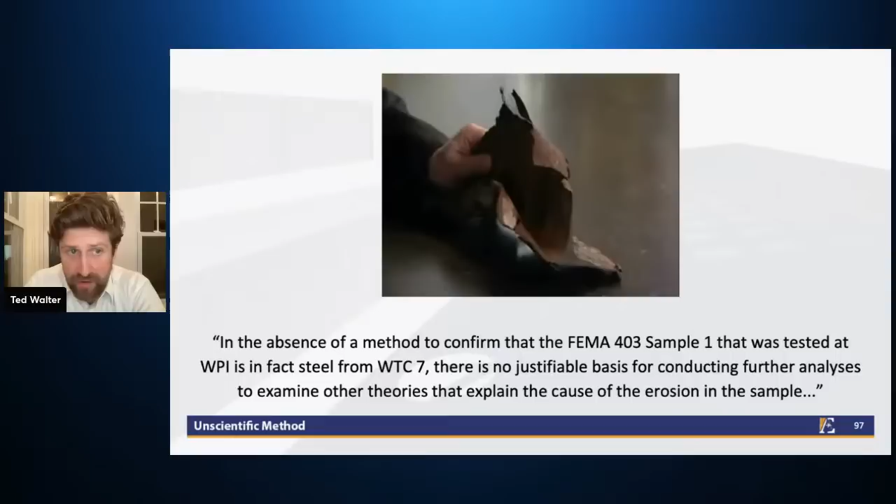Okay, so Jonathan Barnett and every single engineer or scientist who studied this piece of steel since 2001 believes that this steel is from Building 7, because that type of steel wasn't used in the towers, and because they're aware that multiple pieces of steel that were apparently from Building 7 had the same erosion on them.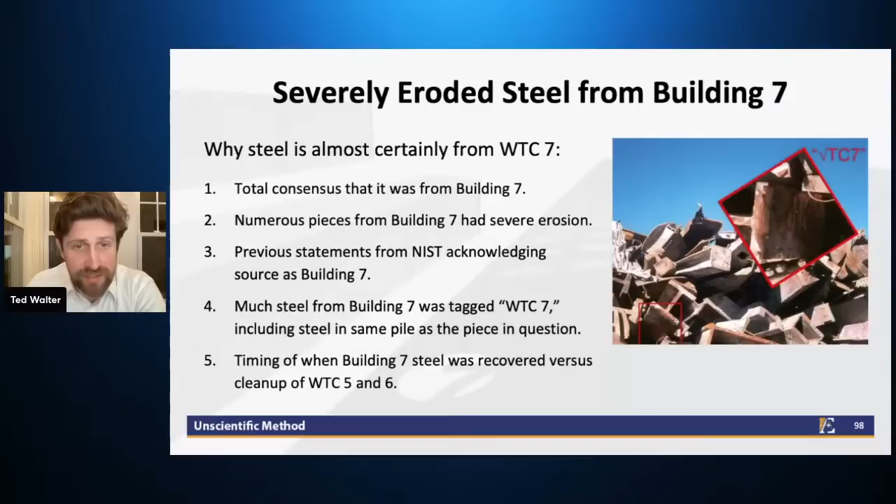And so there's a good chance that all of the steel is from Building 7, especially because Buildings 5 and 6, which maybe had the same type of steel in them, those buildings weren't completely collapsed and broken apart, and they didn't really start disassembling those buildings until later. There are photos from later in the fall of 2001, when Building 7 has been mostly cleaned up, where you still see Buildings 5 and 6 standing there. So this is virtually certain that this steel is from Building 7. The idea that NIST's sole basis for refusing to study it is that we don't know for sure is profoundly unscientific.

Okay, so to summarize everything here, how did NIST sidestep the evidence? Regarding the structural behavior, NIST claimed that the computer model matched the structural behavior when in fact it did not. When it came to evidence of explosions, they attributed seismic signals to implausible causes in their collapse sequence, such as the collapse of relatively small floor sections within one corner of the building. They ignored eyewitness reports of explosions, and provided an implausible scenario to explain the eyewitness accounts of explosions inside the building that morning. Regarding the evidence of incendiaries, they've now refused to examine the steel on the unscientific grounds that it may not actually be from Building 7, when everyone who's studied it believes that it is.